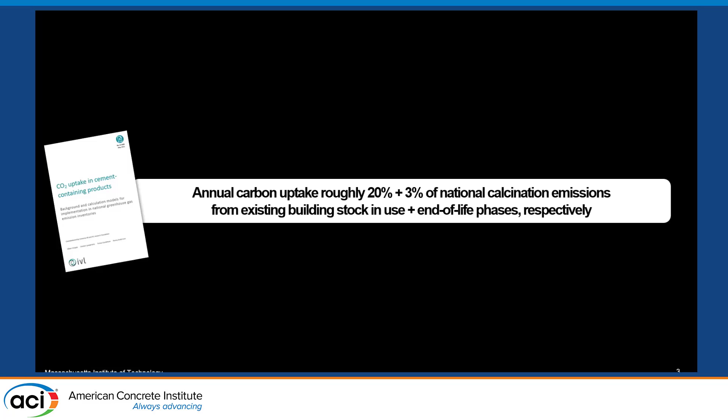As Jamie mentioned in his presentation, there's a variety of documents that talk about calculating carbon uptake in cement-based products, such as the IVL report. The Tier 1 approach that Jamie also talked about says the annual carbon uptake is roughly 23% of national calcination emissions, stemming from the carbonation of existing building stock that is currently in use or reaching their end-of-life stages. This percentage derives from a variety of different studies.

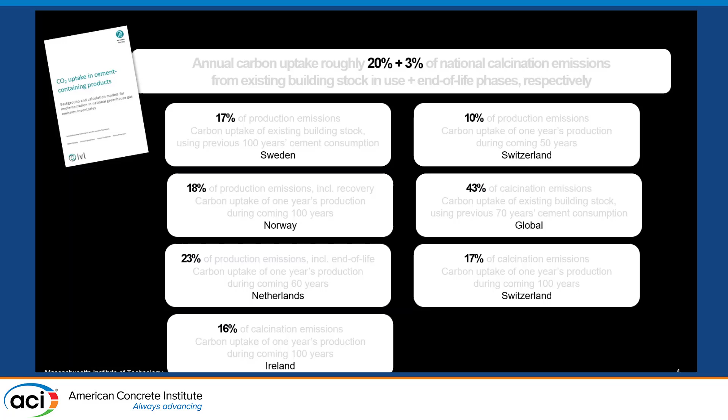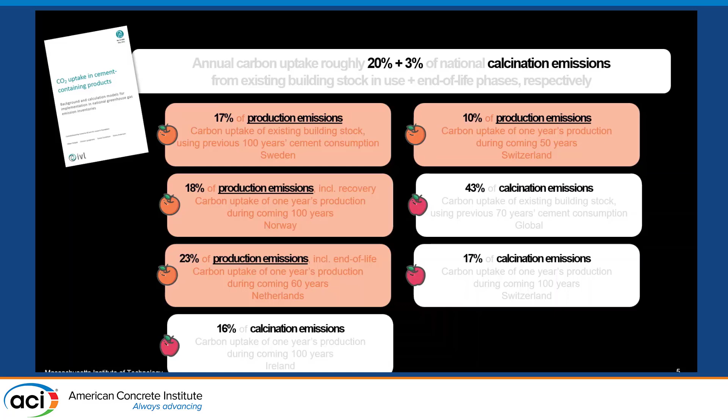It's an arithmetic average across a variety of geopolitical contexts, and that's not the only point where it's like comparing apples and oranges, because the percentage is meant to represent a percentage of calcination emissions that are getting recarbonated, captured through recarbonation. But several of these studies calculate the percentage for production emissions, which include calcination and fuel emissions. The report corrects for this using a factor.

It's also comparing apples and oranges in terms of the percentage being meant to represent the existing building stock. But several of these percentages were calculated from a life cycle perspective, looking at 100 or 60 or even 50 years of the life cycle of 1 year's production. So there is some confusion or equating of impact year reporting and product year reporting, which is more similar to what we see in life cycle assessment or environmental product declarations.

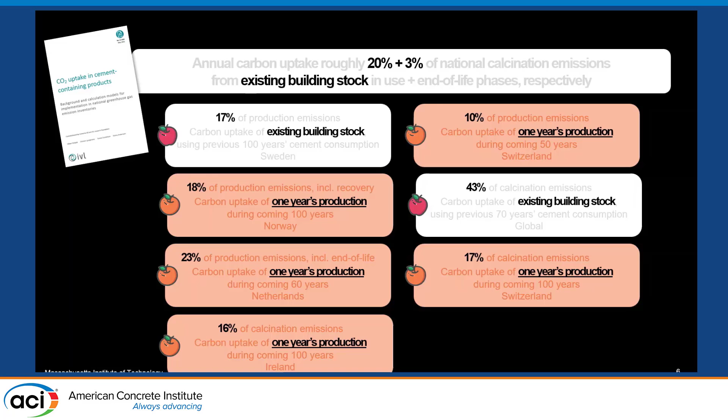The objective of our work is to create clear guidelines for carbon uptake estimation, so that we can evaluate the potential for carbon uptake, or the carbonation potential, as Craig called it, for neutralizing cement emissions. For the remainder of this presentation, I will focus on process or calcination emissions.

Then we can inform methods for environmental product declarations and greenhouse gas accounting, and engage stakeholders throughout the built environment to leverage the properties of cement-based products to reach their carbon neutrality targets.

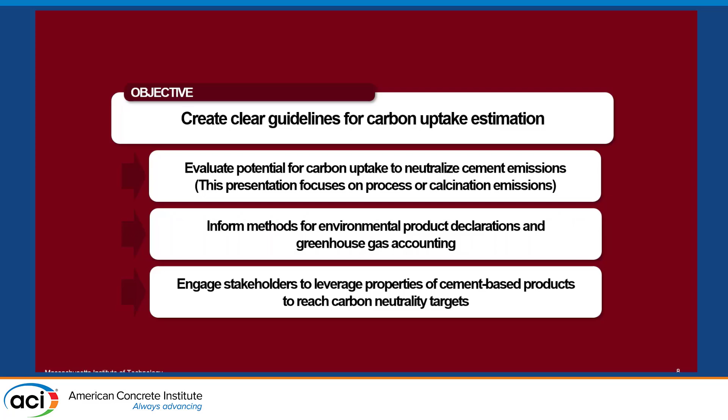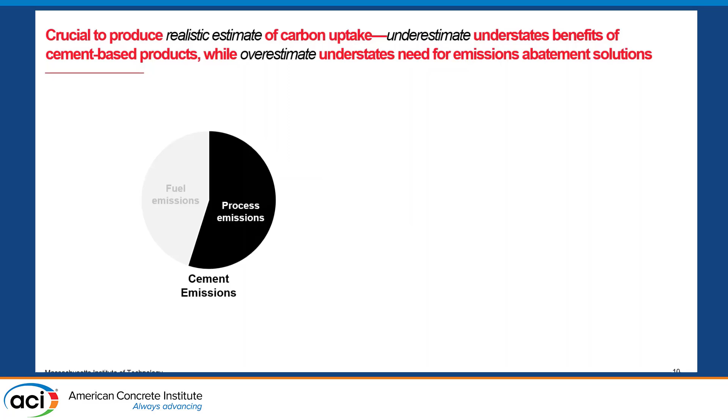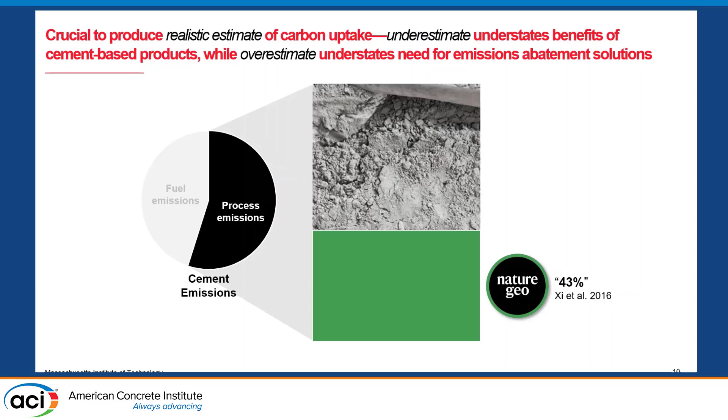As I mentioned, cement emissions could be broken down into process emissions or calcination emissions and fuel emissions, and the process emissions are approximately 55 to 60% of the cement production emissions. Taking those emissions, we've seen global studies report that 43% of these emissions are neutralized through carbon uptake. That got reinterpreted as 50% in the IPCC report and updated to 60% in a more recent study as well.

Estimating the right percentage for how much is getting neutralized through carbon uptake is particularly important because that also gives us an estimate of the portion of process emissions that remain and further need to be reduced to achieve carbon neutral cement or construction materials.

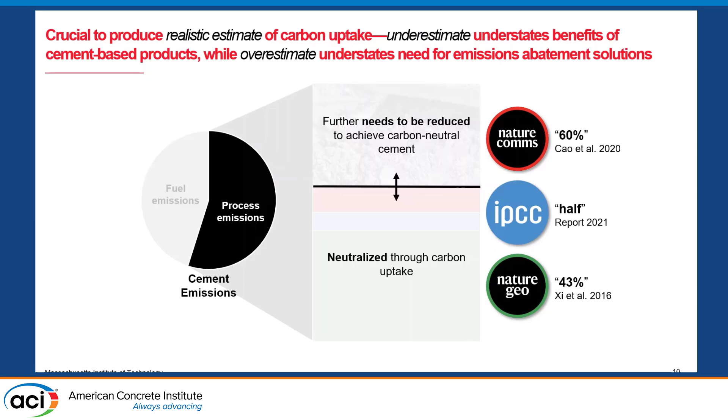It's crucial to create a realistic estimate of carbon uptake, because an underestimate of carbon uptake understates the benefits of cement-based products, whereas if we overestimate carbon uptake, then that understates the needs for emissions abatement solutions.

To produce this realistic estimate, we employ a bottom-up approach, which makes use of data and modeling to characterize archetypes and the context they're found in, to assess individual units of these archetypes. On a high level, these archetypes are buildings, pavements, and other infrastructure like pipelines.

More specifically, for buildings, this includes single-family dwellings versus multifamily dwellings versus commercial industrial buildings at various sizes. After assessing carbon uptake for these individual units, we can scale it up to meet regional or national scopes.

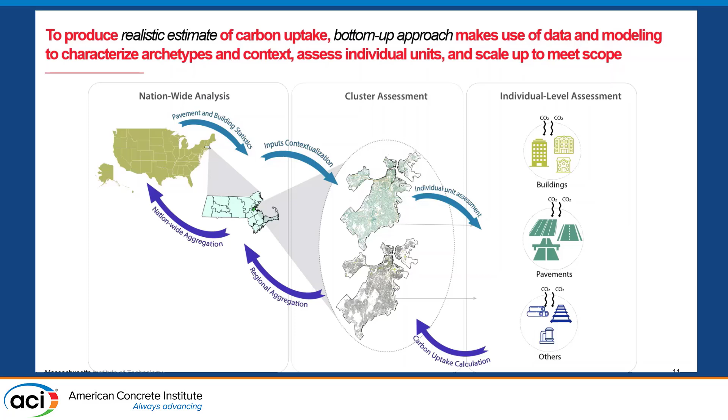With previous studies, researchers employed a top-down approach where the entire national stock is modeled as one huge surface, and at end of life, the crushed concrete is treated as very finely ground and spread out, so there's no space limitations, and all of this crushed concrete is exposed to be carbonated.

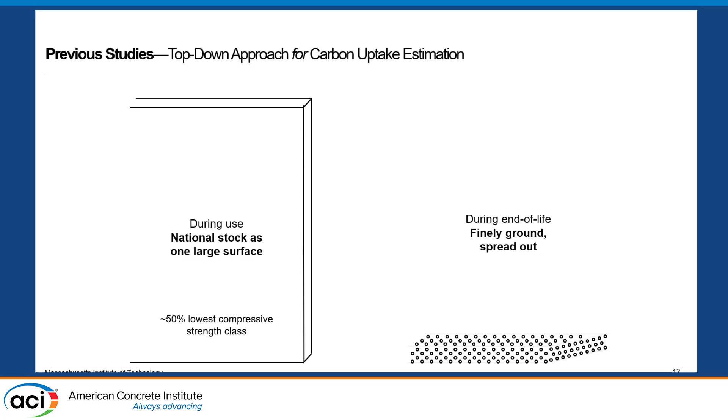With our bottom-up approach, we treat the national stock as a combination of archetypes, which are represented as a combination of archetypical surfaces, as the amount of surface area and the exposure conditions are going to vary for floor slabs versus exterior walls versus a foundation. At end of life, we treat the crushed concrete as a mix of sizes, and it's stockpiled, so not all of the concrete volume is exposed to be carbonated.

Both of these are incorporated into the carbon uptake tool that Jamie was talking about in his presentation, and the drawings you can find on that tool represent the geometry of the stockpile that we've assumed.

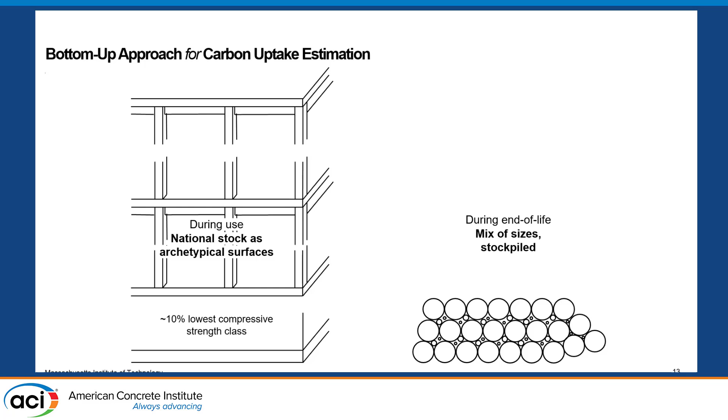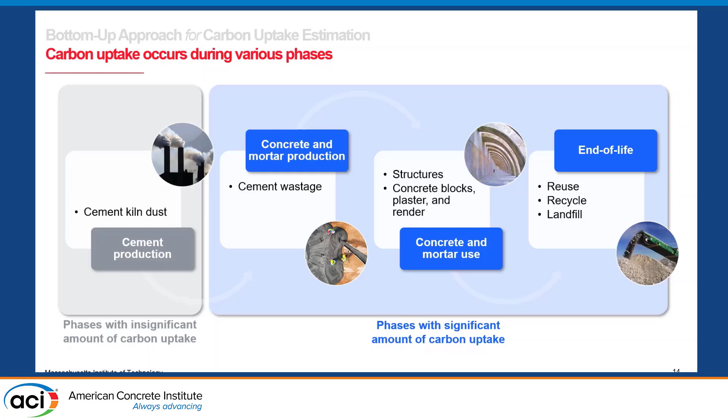Carbon uptake occurs during various phases of the cement life cycle, and phases with significant amounts of carbon uptake include the production of concrete and mortar through the carbonation of cement wastage, the use of concrete and mortar applications such as the carbonation of structural concrete, concrete blocks, plastering and rendering, and the end of life of these materials.

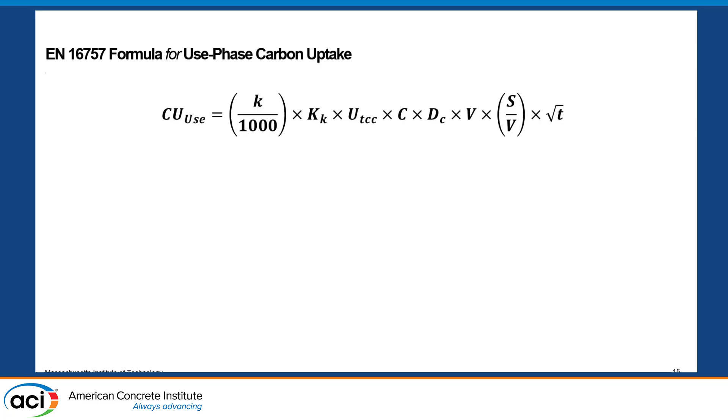We employ formulas that are also used in advanced methods that go into reports like the IVL report and IPCC report, the formulas from the EN 16757 standard, where there's a variety of factors that define the relationship between carbon uptake and characteristics like compressive strength, material definition, and exposure conditions.

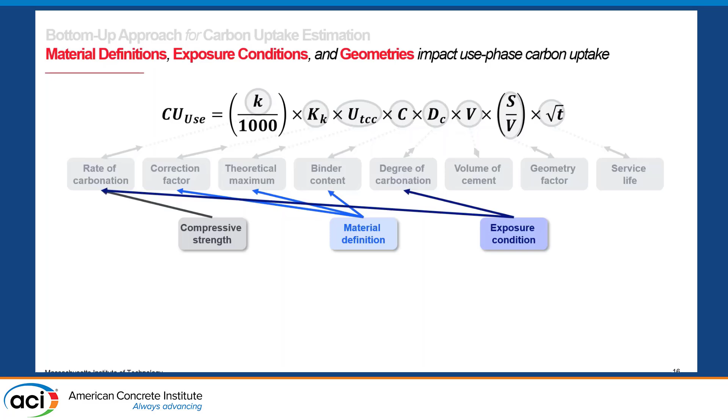We make use of local market data on cement consumption or production to inform the material definition, as well as the volume of cement, because the volume of cement directly scales the amount of carbon uptake that possibly could occur.

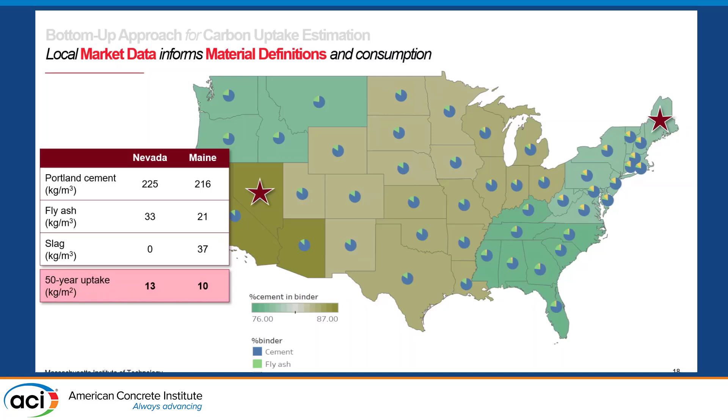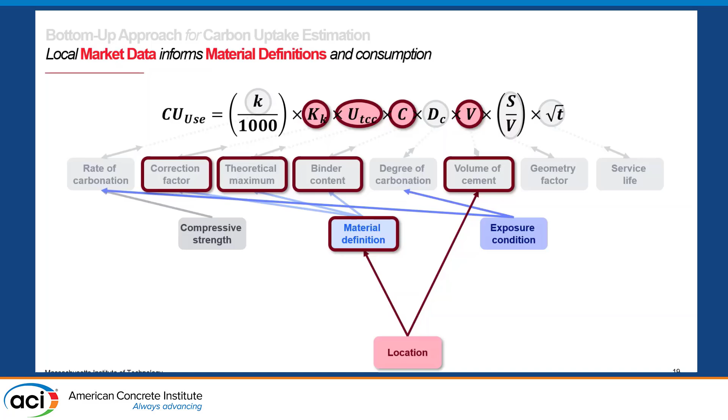If we take two states that have different amounts of binder, but more specifically a different composition of the binder, we see that Nevada, the state with the typically higher amount of Portland cement per meter cube of concrete, leads to a higher 50-year uptake value. So information about the material definition definitely affects the magnitude of carbon uptake potential.

Local data also includes information about the climate, which affects the exposure conditions, specifically for surfaces that are outdoors, because climate includes a breakdown of rainy to non-rainy days. This map shows a gradation of the percent of rainy days in a given year, where the lighter blue colors are the drier states on average, and the darker blue are the rainier states.

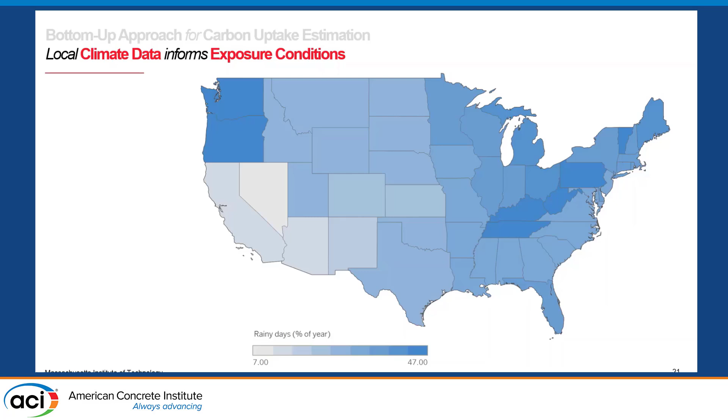Going back to the same example, even if we assume the same amount of Portland cement for both of these locations, Nevada and Maine, Nevada is relatively drier in climate, and Maine is relatively rainier.

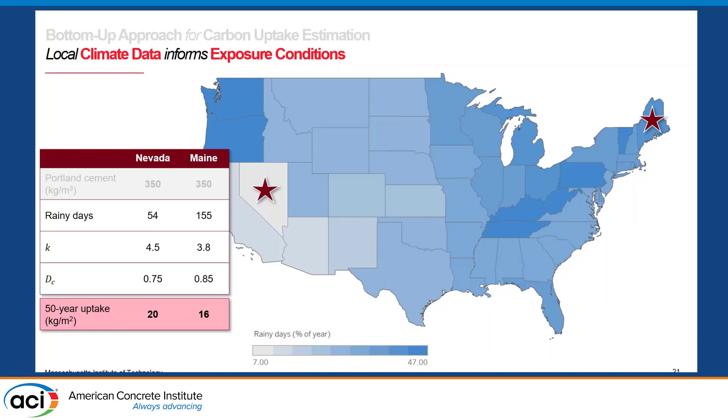So the breakdown of exposure, outdoor exposure conditions, also affects carbon uptake.

Lastly, local data includes housing data or other information about the building stock, which helps us define the archetypes, which in turn helps us identify the breakdown of compressive strengths, because you have a variety of different building elements and building heights that could lead to higher or lower compressive strength use.

The material definition, for instance, some archetypes have infill walls, which are concrete masonry units. Others have concrete structural frames, and this affects the breakdown of mortar applications versus cast-in-situ concrete applications. The archetypes also inform exposure conditions, because it helps us break down the amount of surface that's outdoors versus indoors versus in-ground, such as the foundation.

Archetypes also define the geometry factor, which converts the volume of cement to the surface area of concrete or mortar applications, as well as the service life, the square root of which directly scales the amount of, at least in the use phase, the amount of carbon uptake potential.

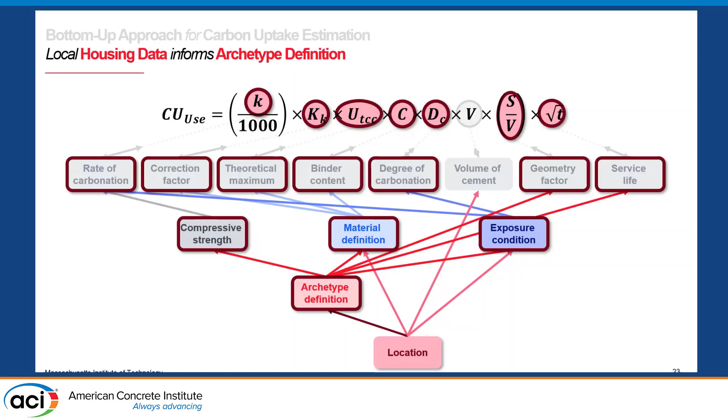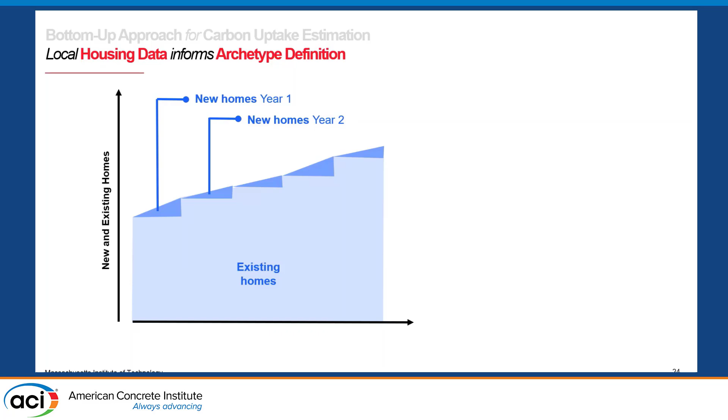So over the years, we have a number of existing homes, and each year we see new homes getting added with the new construction. And if we take a snapshot of any given year,

there are various surveys that inform new construction, such as the Building Permit Survey from the US Census Bureau, and a different set of data that informs the buildings that already exist, such as the American Housing Survey, again by the US Census Bureau. There are similar data sources available for commercial or industrial building types as well, such as the Commercial Energy Consumption Survey from the Energy Information Administration.

So the data sources that we refer to include the US Census Bureau, the Energy Information Administration, and the Federal Emergency Management Agency, because they have this detailed database of the national building stock.

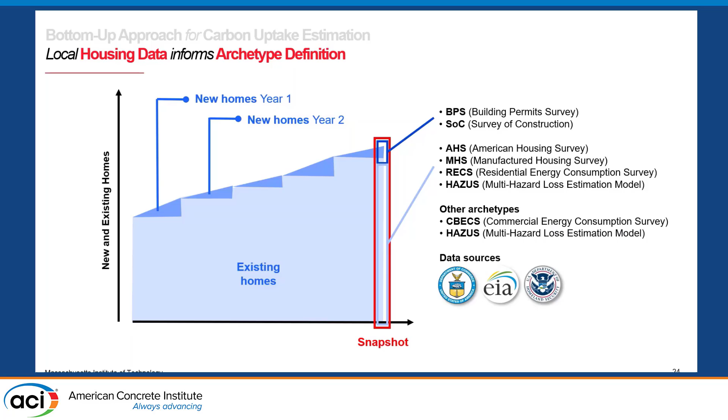So any given locality with buildings gets represented as a combination of these archetypes, varying from low to mid-rise to high-rise structures, to residential to commercial to industrial building types.

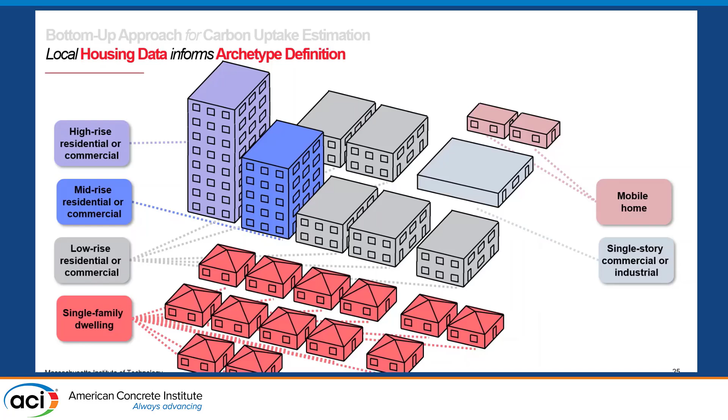Now, if we look at an example of a single-family dwelling, looking at the kilogram of CO2 use phase uptake per meter square of living area or floor area, a large portion of that comes from the basement walls, because the basement walls are CMU units and have this high potential for carbon uptake.

Compared to a commercial structure, basement walls are de-emphasized, and the CO2 uptake potential mostly comes from the foundation slab or the structural frame, where in the single-family dwelling, the structural frame was not assumed to be cast-in-situ concrete. What we see is there's a differentiation between the archetypes in terms of carbon uptake potential per floor area.

Did I do something? Okay.

So the potential per floor area is higher for the single-family dwelling, but when you sum it up for the entire unit of archetype, both the use phase and the end-of-life uptake for the commercial three-story building is higher.

But then we also need to account for the binder composition to calculate calcination emissions, and then we see that the percent sequestration is actually higher for the single-family dwelling at 35% compared to 15% sequestration in the low-rise commercial structure.

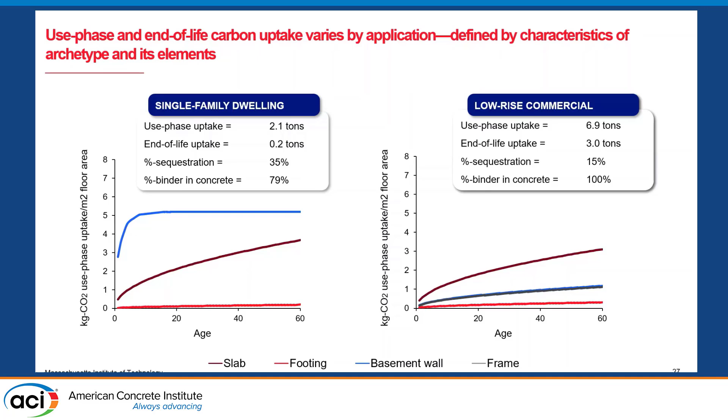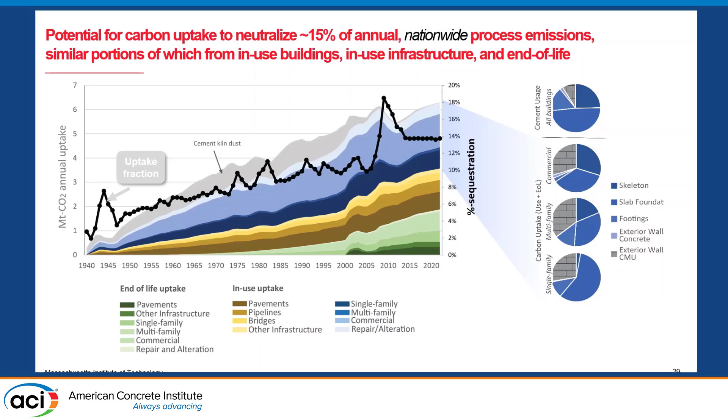Overall, in recent years, our estimate is that there's a potential for carbon uptake to neutralize around 15% of annual nationwide process emissions. And statewide, carbon uptake could neutralize 5 to 25% of annual statewide process emissions. This is our estimate for the year 2018.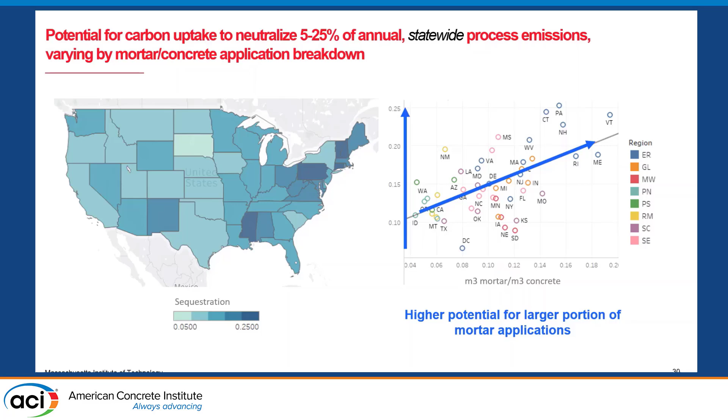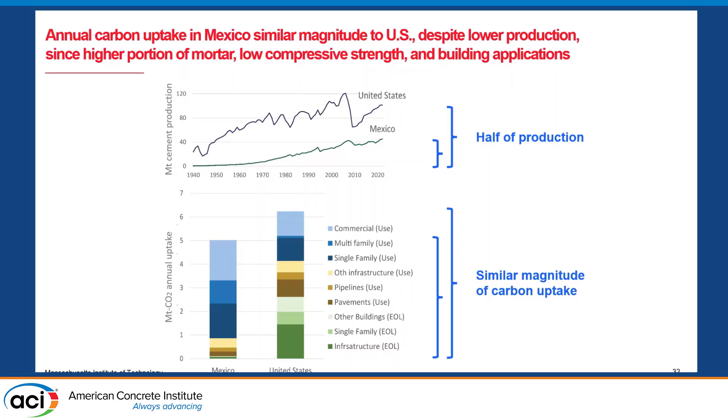So, key takeaways: carbon uptake is crucial to accurately assess both the benefits of cement-based products and to accurately assess the need for emissions abatement solutions.

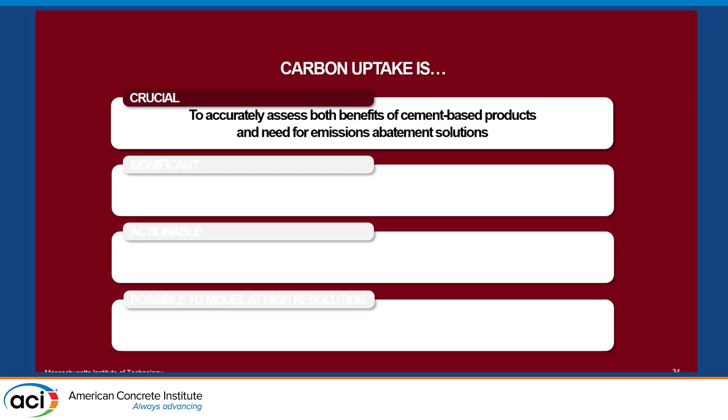It's significant and has the potential to neutralize annual process emissions by around 15% nationally and 5 to 25% on a state scale, as shown in the US study.

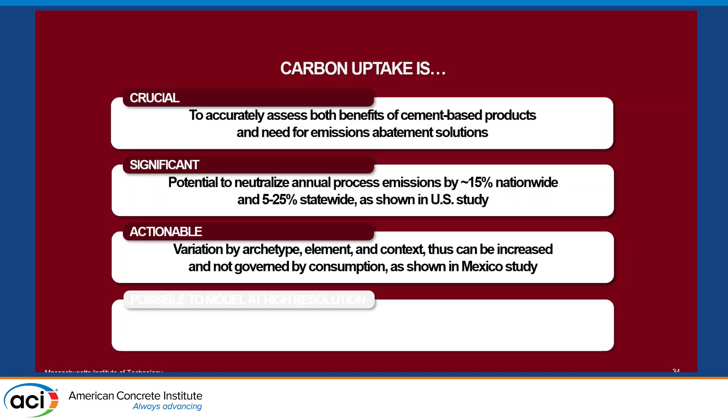It's actionable because we see this variation between archetypes, elements, and contexts. Thus, it could be increased by channeling cement usage to these specific archetypes, elements, or contexts. And it's not just governed by the amount of cement consumption, as shown in the Mexico study.

And finally, carbon uptake is possible to model at high resolutions, as demonstrated by our bottom-up approach, capturing these local variations in archetypes, material definitions, and exposure conditions, which affect the carbon uptake magnitude at various phases of the life cycle.